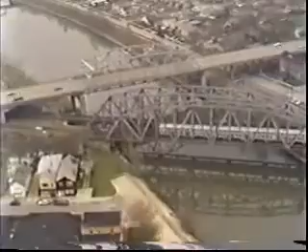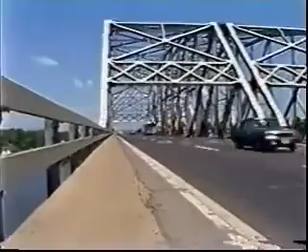Thousands of commuters and freight trains rumble over our railroad bridges. The pounding never stops, but every driver assumes the bridge is safe. You assume it's safe because current inspection information leads you to that conclusion.

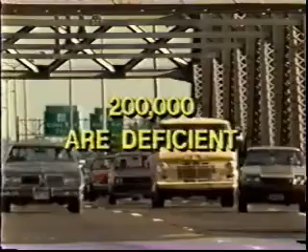With 50 years as the useful life of a bridge, over 11,000 need replacing every year. Currently, 200,000 are deficient, and over 98,000 are structurally weak and must be closed, restricted, or immediately rehabilitated to prevent collapse. An estimated 150 bridges do collapse every year, taking 12 lives.

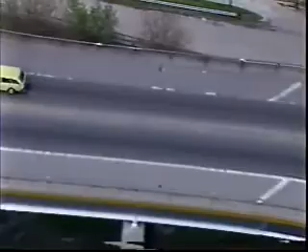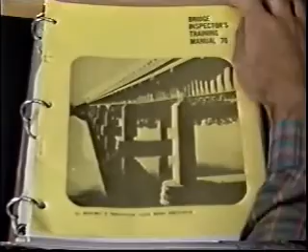The 1967 collapse of the Silver Bridge, killing 46 people, focused national attention on bridge conditions. Congress passed legislation which, while providing some funding to states, requires that each state inspect its bridges at least once every 2 years. According to the Bridge Inspector's Training Manual, bridge inspectors must make objective and subjective observations and transcribe these observations into a written report format.

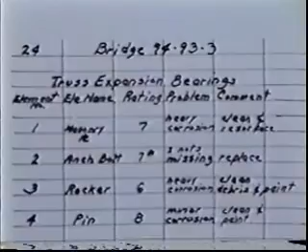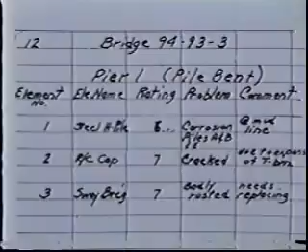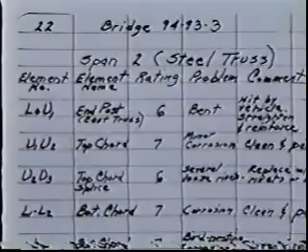This information must be in sufficient detail to give a clear and complete picture of all the conditions that currently exist on every component on every bridge. That's for each of the 565,000 bridges in the nation. 8 to 13,000 bridges per state. Imagine the difficult and time-consuming task of documenting in words, drawings, and even photographs the condition of just one component. To do the same for hundreds of components on thousands of bridges makes the job impossible.

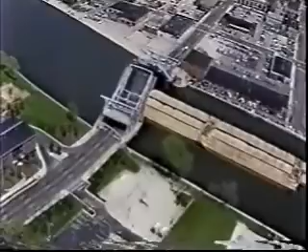It can't be done, but it has to be done, not only because it's the law, but because bridge safety is a matter of life and death for millions. The time, manpower, and money just aren't there.

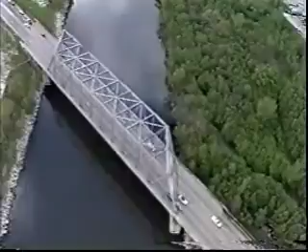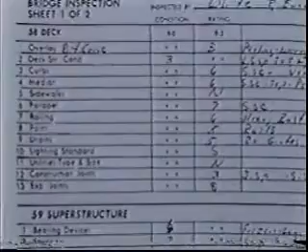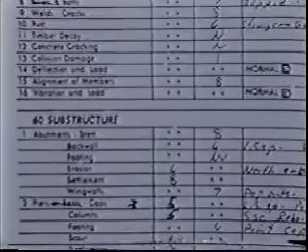So with current bridge inspection methods, the type of information we must settle for is inadequate to give a clear picture of the bridge. Typically, components are lumped together and conditions described with numbers such as 9 for new and 0 for conditions beyond repair and in danger of immediate collapse. The essential completeness of narrative descriptions is reduced to a few words like paint, corroded, or laminating rust.

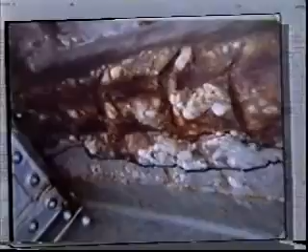Photographs are an excellent format for quickly and accurately recording a component's condition. But this format is not compatible with a written inspection report format. Close-up photographs which show detail like this must leave a lot of doubt as to what the component is or its location relative to the whole structure. The inherent format incompatibility can lead us to wonder if the detailed photo is matched to the correct report.

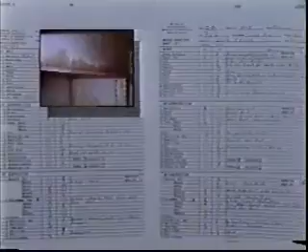The poorer the information, the greater the risk of catastrophe. In fact, the Bridge Inspector's Training Manual states, information contained in many reports has unfortunately not always been sufficient, nor has it been in a form suitable for analysis and evaluation.

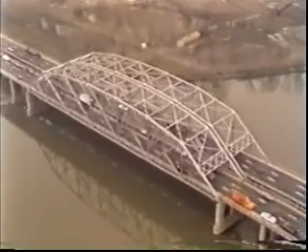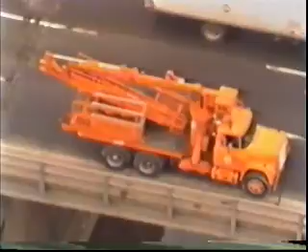So in order to report on all the components, we must first be able to observe them closely from a proper point of view. Until now, access to critical components located on the underside of the bridge was provided by trucks with personnel carrying baskets located at the end of articulated arms operating from the bridge deck. Even a small accidental impact of the inspection truck during operations under the bridge could be fatal to the inspectors.

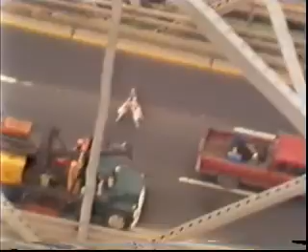So mobile barricades like these trucks are used to protect the inspection truck. That involves more people, equipment, and money. The time-consuming process of setting up and moving the arm through the truss sections causes vital traffic lanes to be blocked, resulting in traffic jams miles long. The impact to the motoring public is enormous.

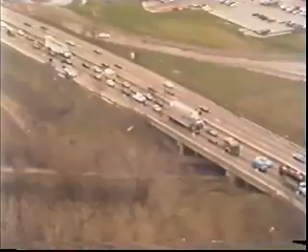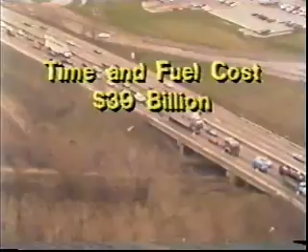According to projections from Texas A&M University, this scene, repeated on only 10% of the heavily traveled bridges in the nation, costs the public over $39 billion every year in time and fuel loss. $39 billion. The whole bridge problem is only estimated to be $41 billion. But is it worth it?

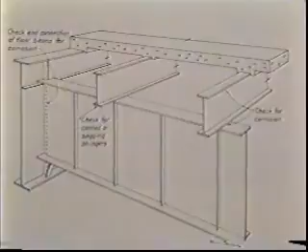Not really, because the arms of the inspection trucks are generally inadequate to get personnel far enough under or high enough to view all the components with a necessary line of sight. These drawings in the Bridge Inspector's Training Manual show a line of sight looking down. This is the line of sight required to make such observations. In the field photographs from the same manual, our line of sight is looking up.

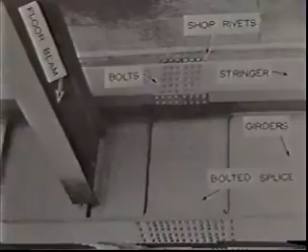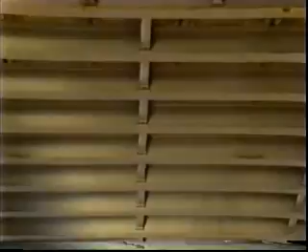The problem is the flange blocks our view of the web, as we can see here. In fact, major holes which occur at the web and flange like this cannot be observed from below. The first several inches of the web and, of course, the shelf created by the flange are completely unobservable. This is the shelf that collects salt and other corrosive materials that accelerate the decay of the steel components.

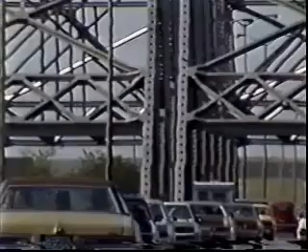What we have is a critical need for access and information. But the lack of time, money, and access currently force us to work with an inherently inadequate reporting system. The result is the needless waste of billions of dollars of fuel and human lives.

During a typical inspection in 1982, one of two inspectors risked his life by leaving a catwalk and creeping out on a floor beam to get a better look at a pin and hanger assembly. However, while he was able to make a hands-on inspection, he was unable to make a proper visual inspection. The 1-inch space caused by the hanger falling off the pin was not felt or seen.

He and the other inspector observed the other pin and hanger assemblies using binoculars from 20 feet away. This component's condition was lumped together with those of other bearings and was reported to have laminated rust. The National Transportation Safety Board states, neither inspector noticed the change of dimensions that was observable, and an opportunity to detect the problem and prevent the collapse was missed.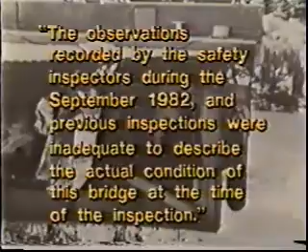The observations recorded by the safety inspectors during the September 1982 and previous inspections were inadequate to describe the actual condition of this bridge at the time of the inspection. The undetected problem with the component was the probable cause of the collapse.

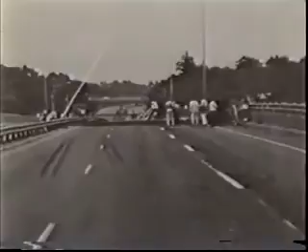That critical pin and hanger component failed on June 28, 1983 at 1:30 in the morning as people were moving at highway speeds on the bridge over the Mianus River. The failed component allowed a 100-foot span of bridge to collapse, creating this void.

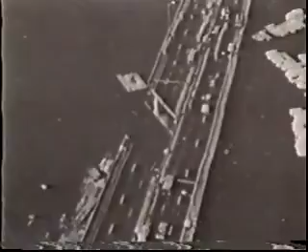2 trucks and 1 car, unable to stop in time, fell with the span. A 3rd car did stop in time, but a 4th did not, and also plunged 7 stories into the void. The direct and instant loss from the collapse was $16 million in bridge damage, 3 people seriously injured, and 3 fatalities.

Architectural Telescans Incorporated began work in 1982 with a team of highly qualified professionals developing a robotic bridge observation and information system. The result of ATI's effort is an information system so unique it's considered proprietary nationally and internationally.

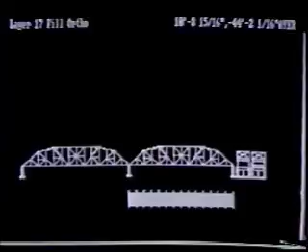ATI begins by accurately loading the DOT's general bridge drawings into ATI's computer-aided design programs. ATI's structural engineers then design a compatible delivery system and submit the entire design for the DOT's approvals. First, permanent track that runs the full length of the bridge is designed for installation on both sides.

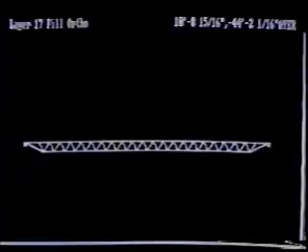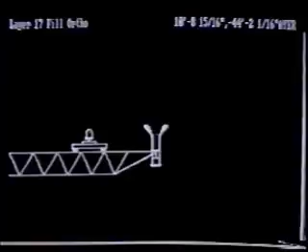Second, a space frame is designed that will span the full width of the bridge. Next, transmission drives are added to each side of the space frame. This space frame provides vibration damping support for a transversing car, which carries a turntable. Finally, computer-controlled robotic arms are installed.

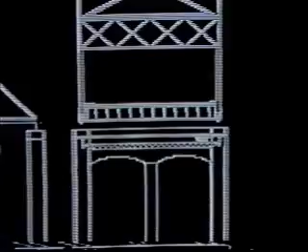The entire assembly can be delivered to the underside of the bridge using the waterway and simple flotation tanks, then lifted into place with cables like a swing stage scaffold without disrupting traffic. Once in place, the transmission drives engage the track and traffic is never disturbed.

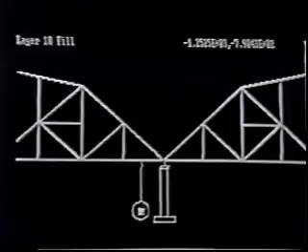The low profile of the robotic arms in the closed position lets the delivery system move easily under the floor beams, giving access to the length of the bridge. When the obstacle of a pier is reached, the delivery system is lowered to the water, floated around, lifted, and re-engaged to the track. Again, traffic is never disturbed.

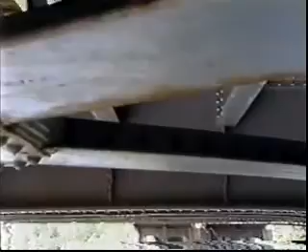The traversing car gives full access from side to side of the bridge, moving easily under the cross-bracing. The robotic arms deliver high-resolution color TV cameras to the locations that give the best line of sight, with computer accuracy time after time, inexpensively and safely. Other payloads include sandblasting and painting equipment and non-destructive testing devices.

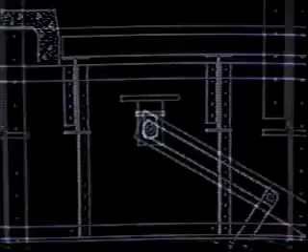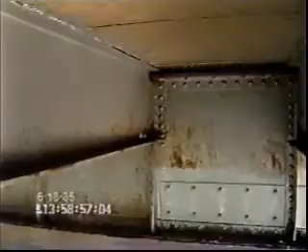The robotic arms blossom open to deliver payloads high up into the spaces between the beams to provide a line of sight never before achievable. ATI's system has unsurpassed access to the bridge components while providing a permanent time-dated record at the rate of 30 frames per second. The system delivers large, clear overviews while zoomed out, or with high magnification, allowing the smallest of faults to be detected.

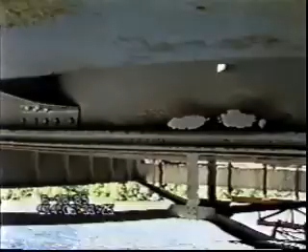Important information on every component is collected in seconds of real time and can be viewed, understood, and shared with objective reality in the comfort of your office with the ATI reader. At the reader, you are in control. You can quickly move through ATI's telescans at high speed in forward and reverse, or from frame to frame in slow motion. You can stop at any frame and view it closely without distortion.

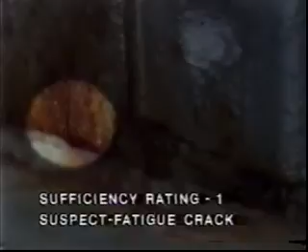Compatibility of format is achieved with a keyboard, where you can type text of notes, work orders, and sufficiency ratings right over the picture. But what about location? How do you know where a given view is relative to the whole of the structure? ATI has programmed a personal computer to act as a location plotter. A coordinate signal sent out by the ATI delivery system becomes an identification point on the same 20-megabyte hard disk the bridge drawings are on.

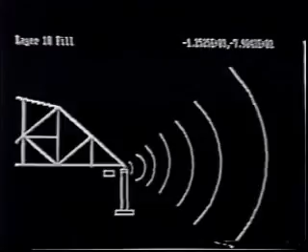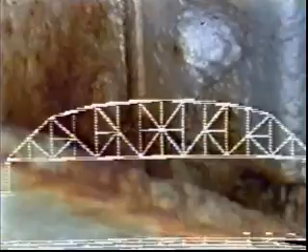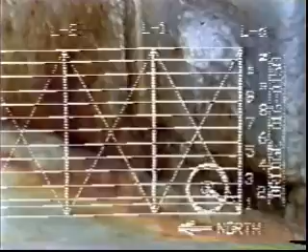So with computer and video telemetry running together at the reader, you can fade in and magnify the bridge floor plan and locate the operating position of the camera. The integration of computer-generated bridge drawings and telemetry together allow you to identify problem areas and take appropriate action. The ATI telemetry system is also mounted in helicopters to provide the same important information for deck and superstructure conditions.

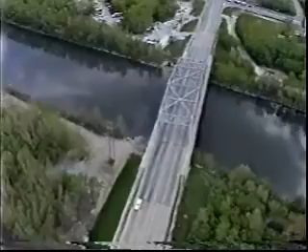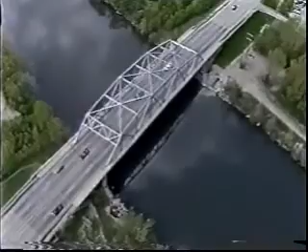Architectural Telescans is more than a provider of hardware. ATI is a team of professionals. Engineers, PhDs, managers, experts in electronics, robotics, systems, and software. We are a management resource ready and able to install, operate, maintain, and customize equipment to each application. ATI's technology brings down the cost of bridge observation while vastly improving the quality of the information.

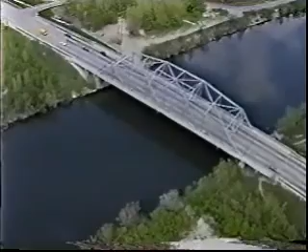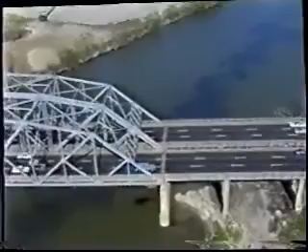Imagine being able to see into every nook and cranny, inches from every surface, yet be safe and comfortable on the ground. Imagine being able to observe and perform non-destructive tests high into the void air spaces of a structure in any weather without taking even one lane of traffic from the bridge, moving fast from point to point, doing in hours what used to take days.

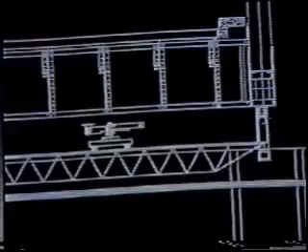Imagine being able to capture the image of a surface and obtain NDT sensory results so systematically that years from now you could track the growth of a crack and even project the growth of a flaw with computer projections. Imagine the objectivity of having time, date, and accurate location information inseparably combined with the observation image, all recorded at the instant of observation. Imagine what ATI can do for you today and tomorrow.